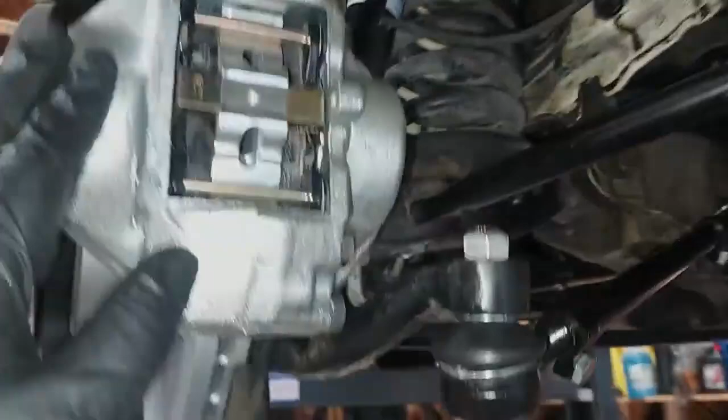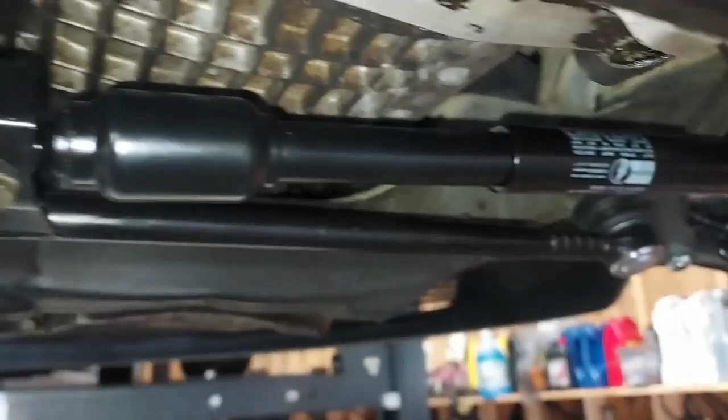All right guys, we're officially done with the front end rebuild. New bearings, cleaned up the hubs, new rotors, new calipers, new pads, shock, new ball joint, new outer tie rod, new center link, new Bilstein steering stabilizer, new outer tie rod here, new brake control rod bushings, new control rod to lower control arm bushings, and that was a lot of work.

So what we're going to do now is get on a fresh oil pan, because we can see this oil pan has a dent in it, and I don't like that. The car still runs fine, it's not affecting anything, but we want to fix that.

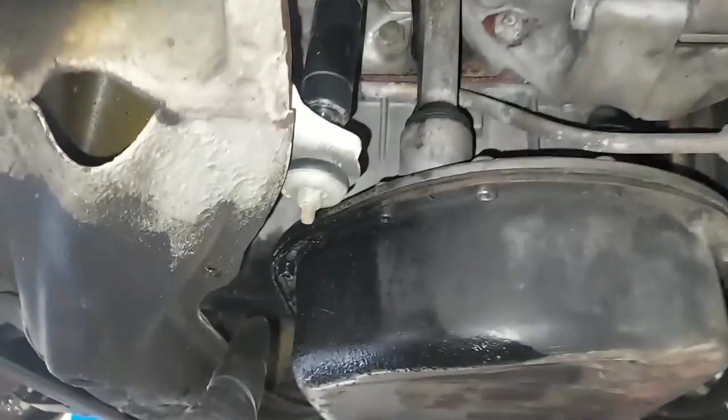The way we do that, there are like 30 little Allen bolts around here. These only torque down to like 8 Newton meters. It is so small of a torque setting, but the way they keep it in place is just they put a lot of them. If you tighten them too much, you bend your new pan and it's not going to seal correctly. So let's go ahead and drain the oil and get that pan off of here. Changing the pan is going to let us do the oil change service too.

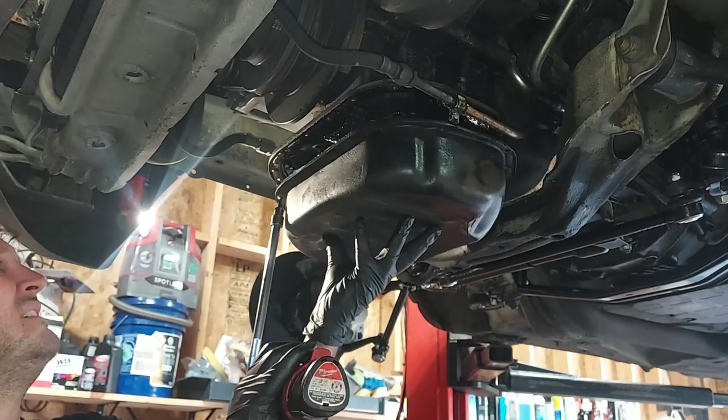Beautiful, we'll just set that right there. What we're looking at here is the inside of the body of the engine.

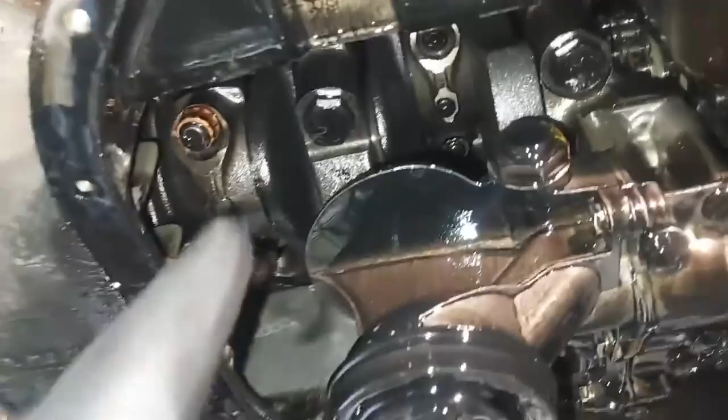There's a rod right there. There's a main bearing cap right there. There's another main bearing cap. Here is the oil pump, that just is covered in oil. It lives in oil. There's the oil chain, double roller chain for the oil pump. That's how durable these motors are, they put a dual chain on there.

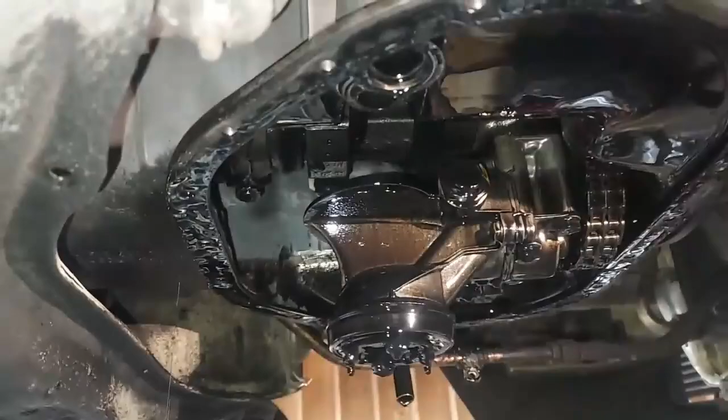And here's the oil pickup, and you can see right there, there's our nice clean screen. See how clean that screen is? There's no debris or anything in there. So we literally don't want to touch anything here. We're going to wipe around the edge, clean that off, and then put our new gasket and new pan up there.

All right, let's go ahead and wash up those nasty old oil pan bolts. I just put them in a cup, stir them around. There we go. See how clean they are now?

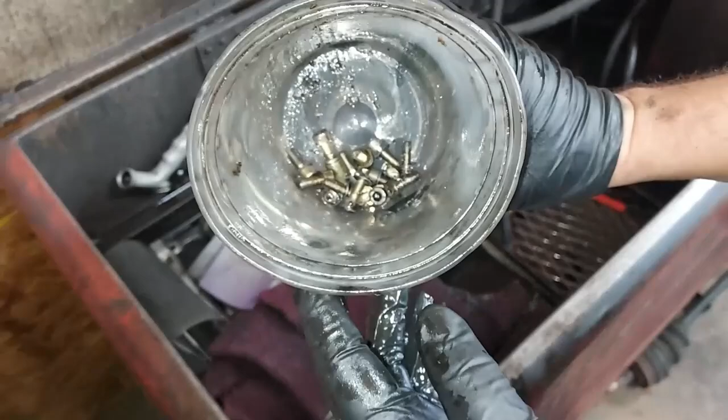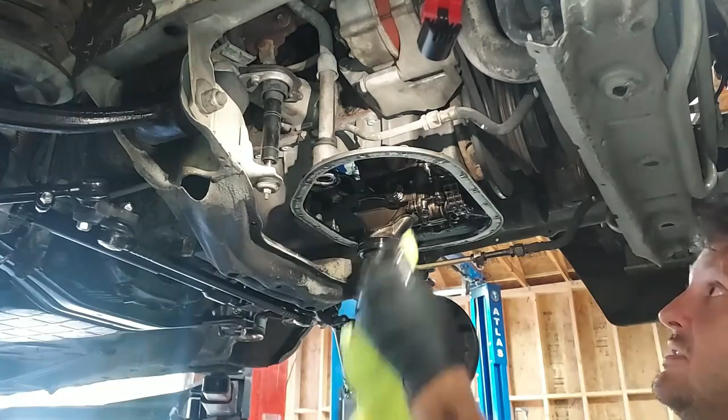So let's go ahead and put this pan back on. Guys, you don't need to get it perfectly clean, there can be a little residue on there, but you just want to try to get the majority off. And you don't want to use sealant up here because it's a paper gasket and it requires no sealant. All right guys, that is sufficient, that is nice and clean, and we have a smooth gasket surface.

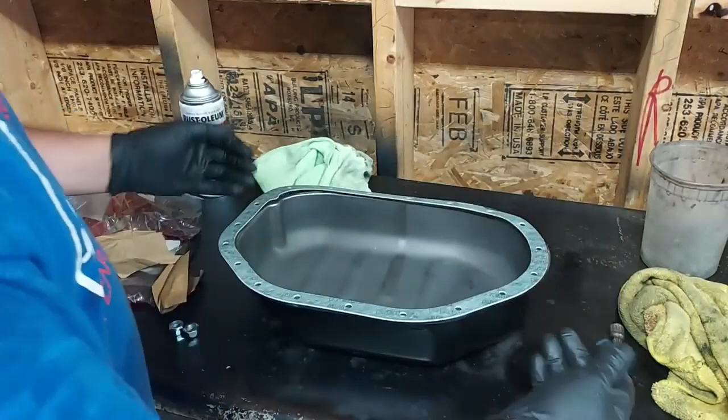All right, so here's our oil pan gasket, and the oil pan has been all cleaned up, nice and shiny. So we're just going to get 2 bolts in there to hold the pan in place, and then we'll go around and torque all of those to 8 Newton meters.

The Germans, we need 47 bolts for the oil pan. Yeah, we need 47 very tiny bolts. That was like a horrible German accent. It's almost like Toyota, they do the same. Wunderbar, wunderbar, as they say, yeah. Yeah, yeah, all right, thanks man.

That'll hold it until I can get the rest started. So anyway, I'm going to go ahead and do that, and I'll probably put it on a time lapse here.

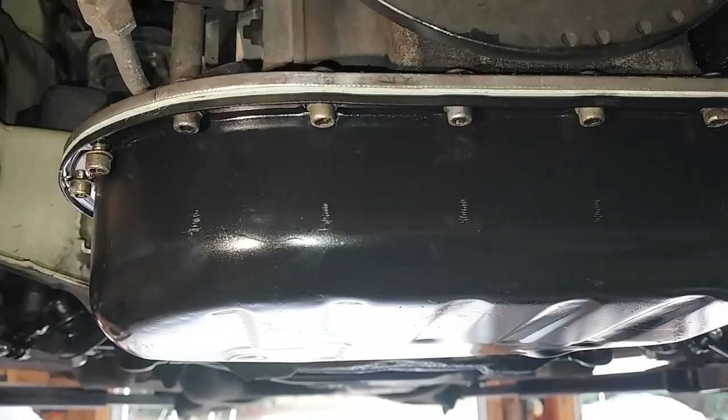Okay, we have all the bolts in. You can see that we have our spacer for the transmission cooler line. And we need to torque these down to 8 Newton meters, which is basically 70.8 or 71 inch-pounds, because my small torque wrench is measured in inch-pounds. That's it, it is not much, guys.

Hey, remember the hood. Oh, I'm not going all the way up. Okay, I'm only going up just enough to get the wheels out of the way so I can get to this bolt.

All right, there we go. Got them all torqued down. And we are good to go with our brand new oil pan and brand new gasket. Looks really nice.

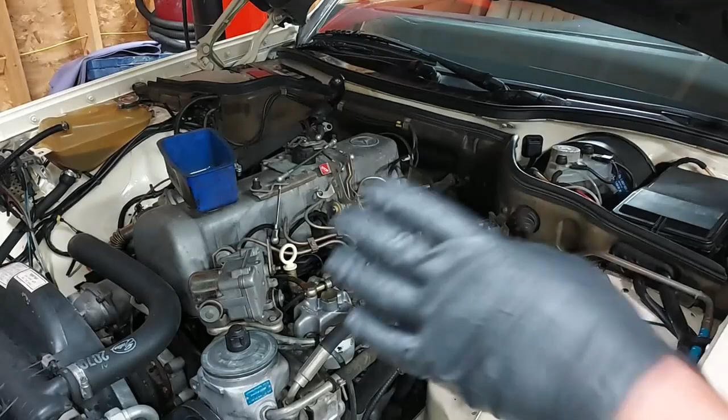All right, so now that we have the new oil pan on there, let's go ahead and do a fresh oil change.

There we go. And there's our old O-ring that we need to replace on the filter. And we'll go ahead and put our new filter on here, and we need to put our new O-ring on there too. All right, put our new O-ring on there. There we go. And let's put this back down in here.

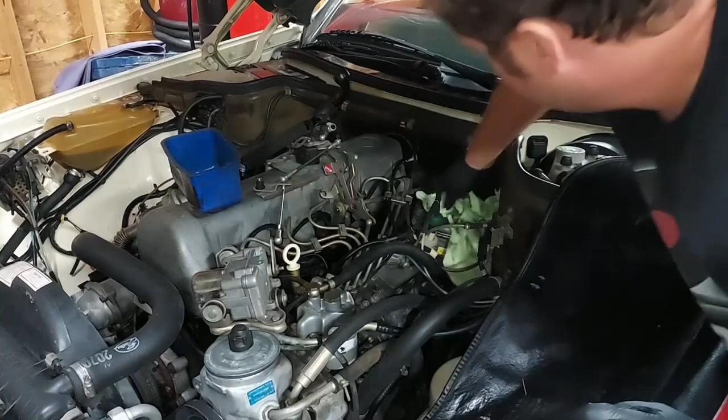There we go, that is snug. Let's wipe that off, and then we'll take a look and see what that looks like.

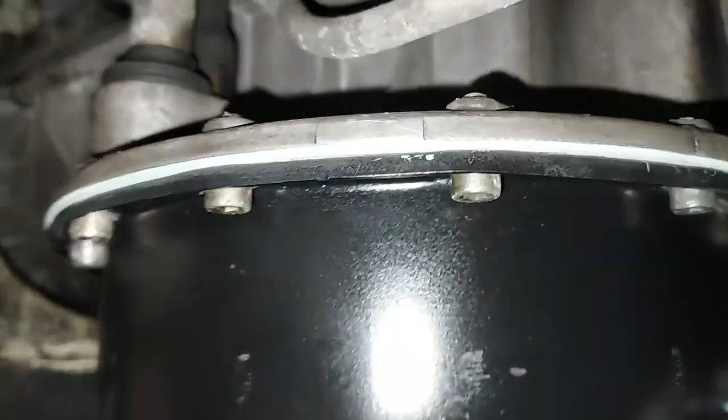All right, we definitely have enough oil in there to seal the oil pan, and we can see, good, we have no seepage at all. Of course, we'll check that again after we run the motor. All right guys, what we want to work on next.

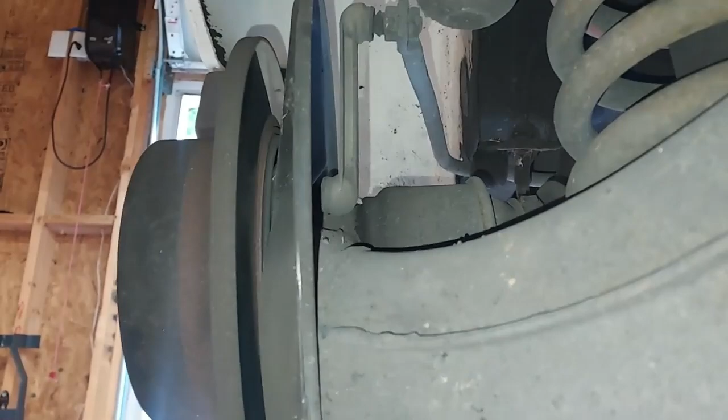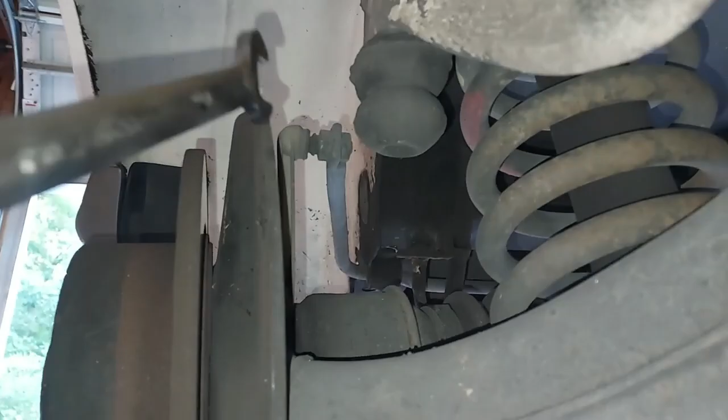There we go. There's our sway bar end link, and you can see the boot is no longer intact up there. We got a 17 millimeter right down here we got to break loose. And then there's a 17 millimeter right up there we want to break loose too.

There we go. Here's our old sway bar end link. See how the bushing's ripped? And that's just kind of flopping around in there. I'm sorry, not the bushing, the boot is ripped. Here's our new one. See how stiff that is?

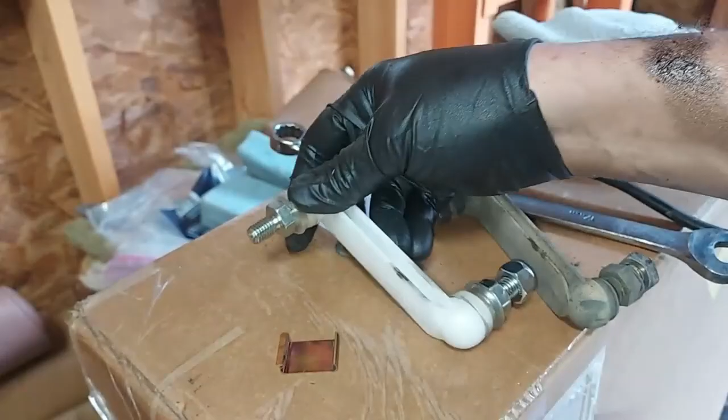So let's go ahead and put that back up in the car. Hold our nut right there. There we go. There's our right sway bar end link, and there's our left.

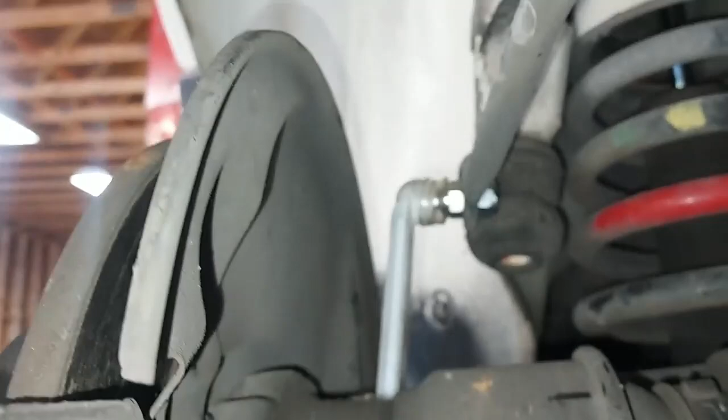So next we want to go ahead and start taking out the shocks, calipers, and rotors. These rotors are still pretty damn good, but I ordered a brand new set, and we're going to go ahead and change the hoses, calipers, and rotors, along with the Bilstein shocks in the back.

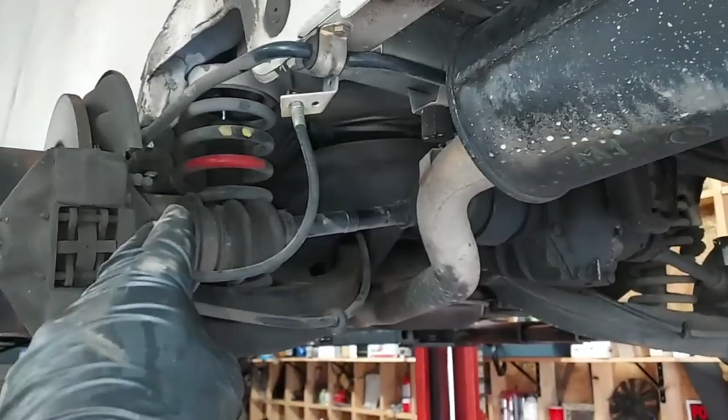All right guys, you can see I'm on the back of the car, and we took the seat bottom out. There's just a button you press on the seat bottom. Let me show you that button. See that little, it's actually a red lever on both sides, and you just press that lever, and the front of the seat will detach from these brackets here.

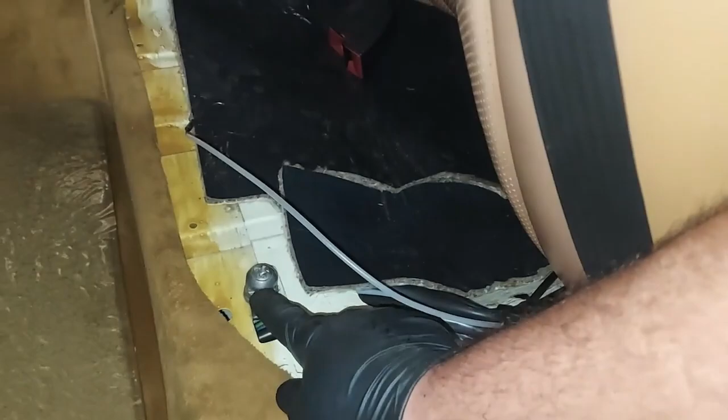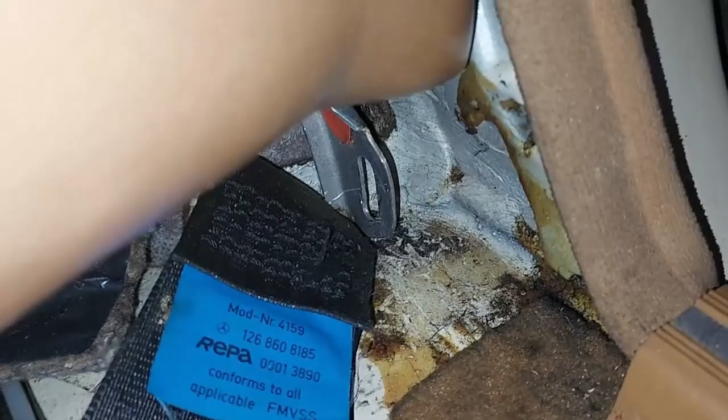And then on the back of the seat, there is, you probably can't see it. Let's see, there it is. We have a bracket right there that goes into the side of the car, one in the middle and one on the other side. And then the back of the seat, there's clips right up here. If we look through this glass, you see there's the brackets on the back of the seats that go onto these clips. So basically, if you lift up the seat, it'll detach from these clips, and then you can pull it forward.

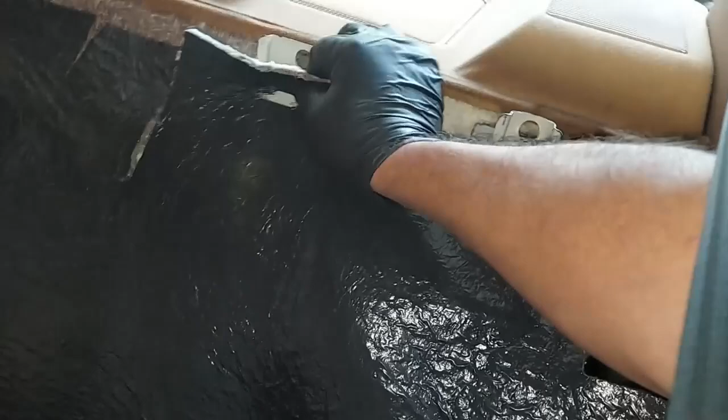When you pull it forward, I like to put the seat belts around it to hold it in place. And then right here we have our insulation, so we just disconnect it, fold it down, and this is what we want access to. Right here, that's the access hole for the shock. Let me get my screwdriver.

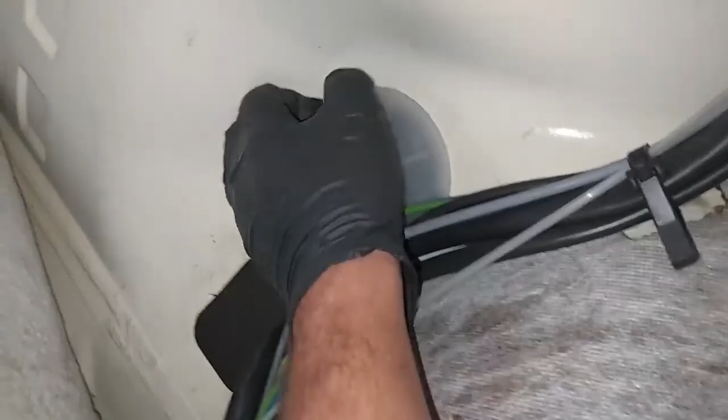Hey, can I use your pocket screwdriver? Thanks.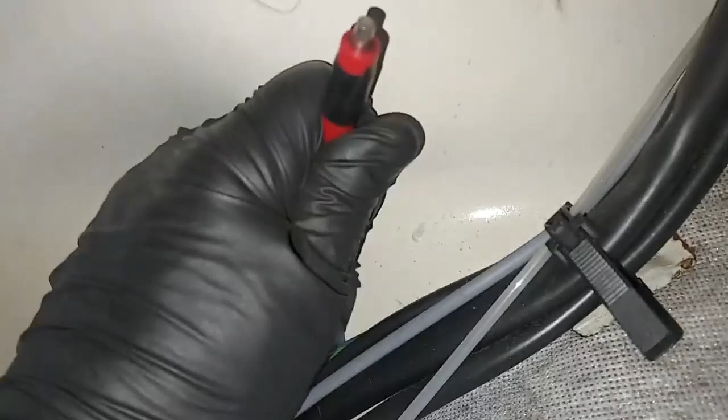Here's the access hole. Come on, I need a bigger one. There we go. There's the access hole for the top of the shock.

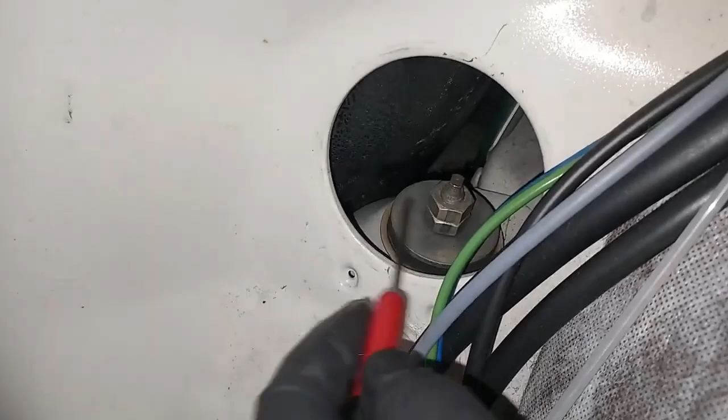So we're going to take those two nuts off and then lower our shock through the bottom of the car to change our shocks.

And then this is the access hole for the fuel sender. You can see we can disconnect the fuel sender right here and use our special tool to screw that out, and that will allow us to clean the fuel sender. So let's go ahead and tackle that now.

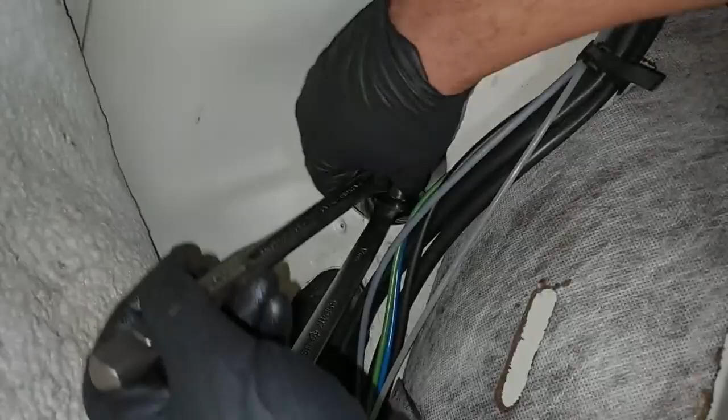Okay, so you got to have this shaved down real thin like that, so it fits around here, and that allows us to get a socket on the top of here and break it loose. We can put that on here like that, hold the bottom one still. There we go. And that nut will come off.

All right, so we're under the car now. You can see I've already taken one of the bolts out. I'm going to go ahead and take the other one out. And there we go. There's our shock.

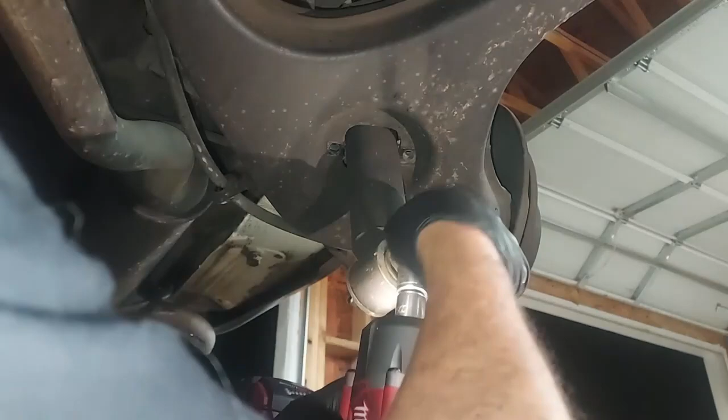We're going to put some nice new Bilsteins in here. Let's go ahead and lay that one down. And there we go. That's why we just attached them from the top.

All right, you can see we have the nice new Bilstein shock here, and Bilstein gives us all new hardware and bushings. Now, to install the bushing, it's very simple. Basically, you just put it up, you got to thread it back through the hole on the top. Gonna find the hole up on top. There it is, and then it fits right. All right, then we're just gonna thread in.

I need the other one. We're gonna thread in our new hardware here.

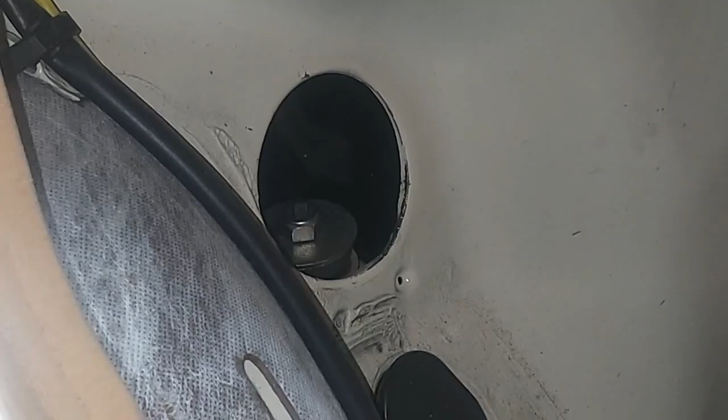And then we'll torque that down, and then we're ready to go reattach it on the top side. All right, so as you can see, we've installed our bushing, our cover plate, and our lock nut. Let's just go ahead and tighten all that down.

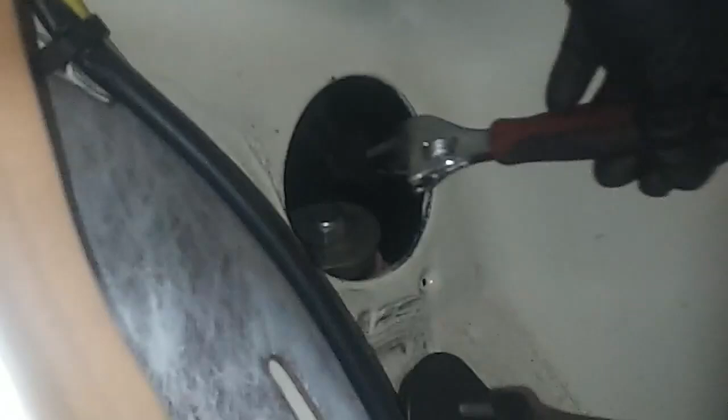Now I like to look at the position of the top of the shock to see if it's spinning as I'm tightening. It looks like this one is, so we're going to have to hold the top of the shock still while we turn it with a wrench. Right there, and we can hold the shock still, and then we can actually tighten it.

Okay, now we need to remove our fuel sender. You can see I got my tool on there. There we go, it just screws out.

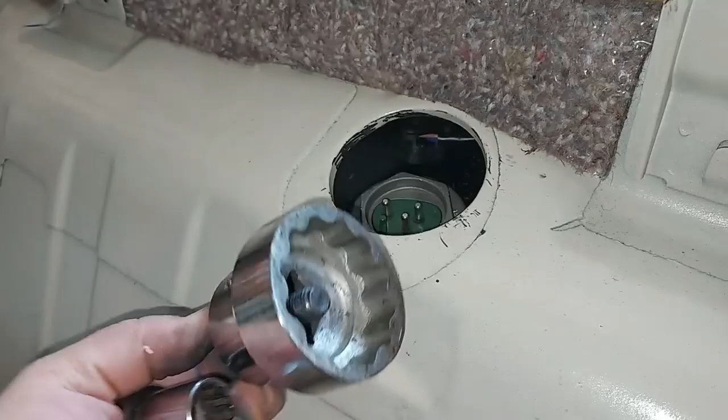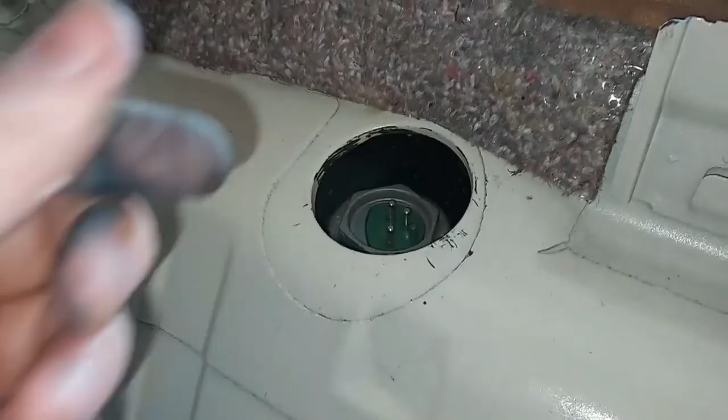And we can get the rest out by hand, so let's remove that. There's the tool, and then we'll screw this guy out. We need to get a little catch pan because some diesel is going to flow out of this, so let's go ahead and finish pulling that out. All right, we got our catch pan here.

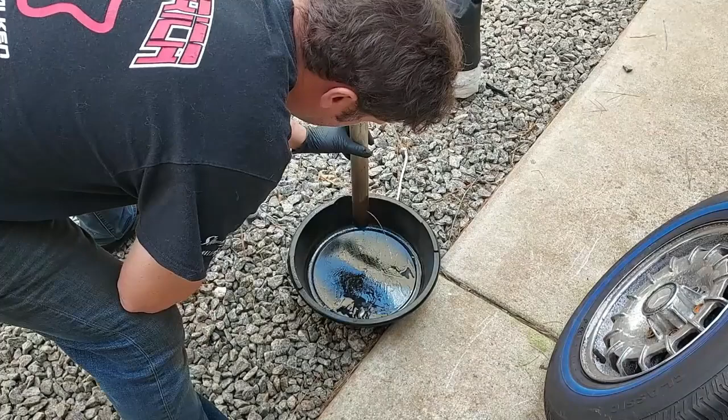There we go, these senders are cleanable, so we're going to get it over the bench. We're going to disassemble it, we're going to clean it out to make sure there's no gunk in there from years of dirty diesel going through it, and then we'll reassemble it in the car.

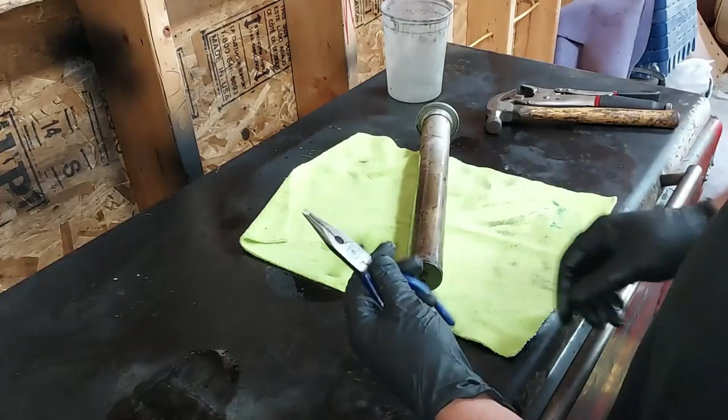So to disassemble these and clean them, I just modified a set of pliers and shaved down the ends till it was kind of a fine point. There's a little nut right in here with some grooves, and you just get it in there and then you can spin it and it comes off. When you see it, you'll know what I'm talking about. So we'll set those pieces aside.

And there we go, now we can kind of pop it loose. Oh good, this one's actually in really good shape. I don't know if you can see on the camera, but there's 3 wires here and a bobber, and that bobber moves up and down on those wires. So what we want to do, we're going to go ahead and just clean off all the gunk from the bottom down here, I see it's a little dirty. But other than that, this is a very clean sending unit, and we don't need to really do much to it.

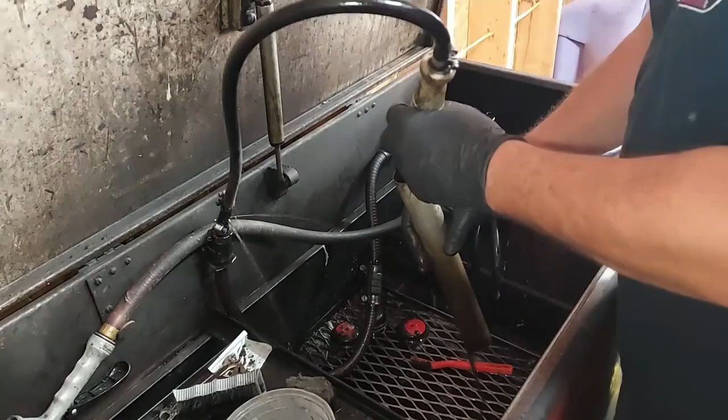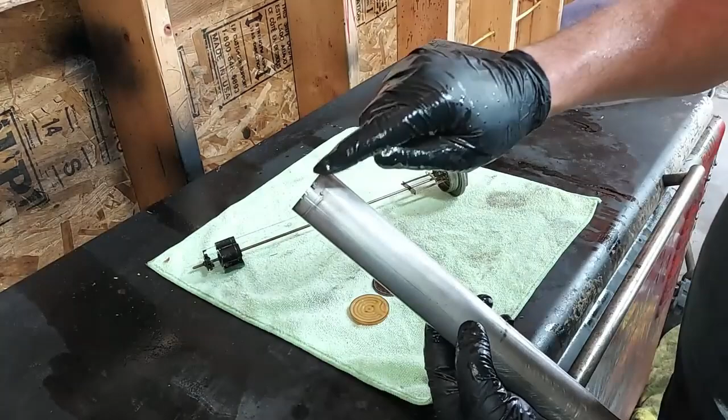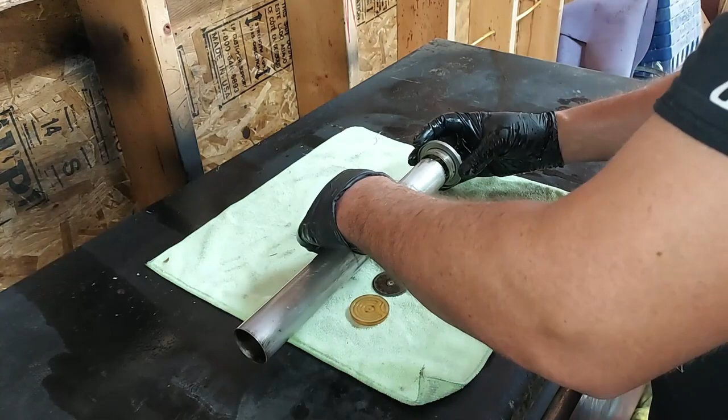You can see our bobber is working excellent. So to reassemble, you have a little notch right here, and that notch matches up with the notch right here. Just want to be careful not to break your metal lines, the little metal lines in here. We'll just slide that through like that, line it up with our notch. There we go.

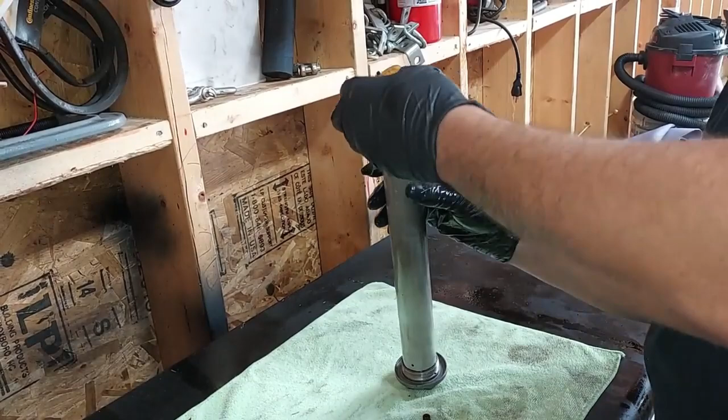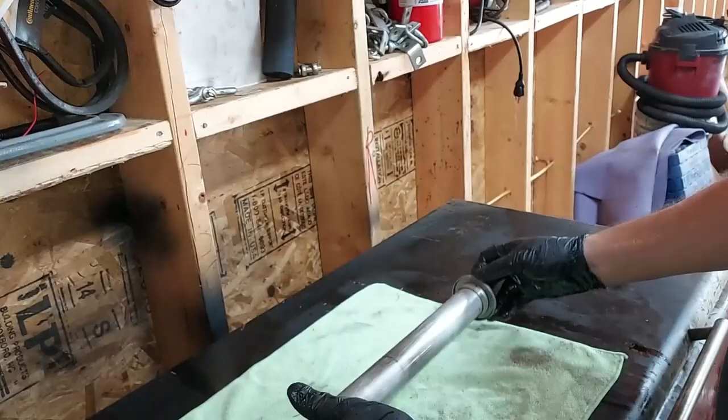Then we're going to put our plate right back here on the bottom, like that. Perfect, and put this plate right there. And then we want to screw our nut back on. Perfectly cleaned and restored sending unit. That'll last another 100,000 miles probably. Let's put it back in the car.

Okay, when you're putting your fuel sender back in there, you want to make sure you include an O-ring. You want to put a new O-ring seal on there so you don't get diesel fumes up in the car. We just slide that back down in there. And there we go, there's our cleaned fuel sender.

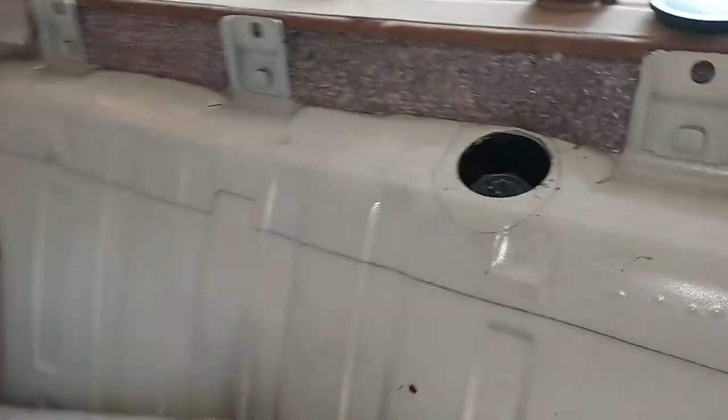All right, so at this point we've installed the new shocks, we've cleaned the fuel sender. Let's go ahead and plug it back in. There we go, and we'll put our cap back on there, and let's put our shock cover back on there. And we'll put it on the other side, and then let's get this back seat back in.

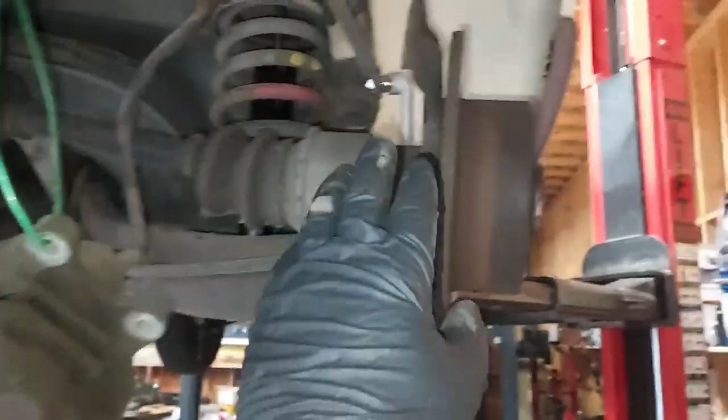Okay, we got our beautiful new Bilsteins and sway bar end links in there. Now we are removing the rear calipers and rotors, and we're going to go ahead and put some brand new ones on here.

Okay, to remove the rear rotor, once you have the caliper off, it's pretty easy. Make sure your parking brake is not engaged, so you can slide it off here. And there we go, and you actually have your parking brake right here, and here's your hub.

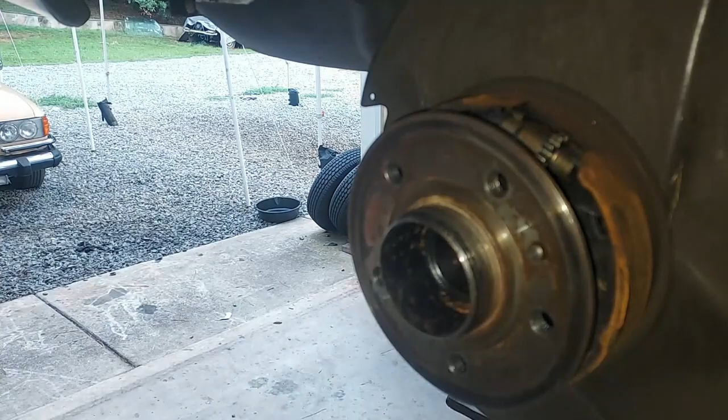So let's go ahead and get our new rotor to install. You'll notice there's a locating pin, a dowel pin right here, and that dowel pin lines up. Here we go, with the dowel pin on our new rotor.

So there we go. Now let's go ahead and crack loose this brake line, and we'll put our new brake line on the new caliper and then reattach the line.

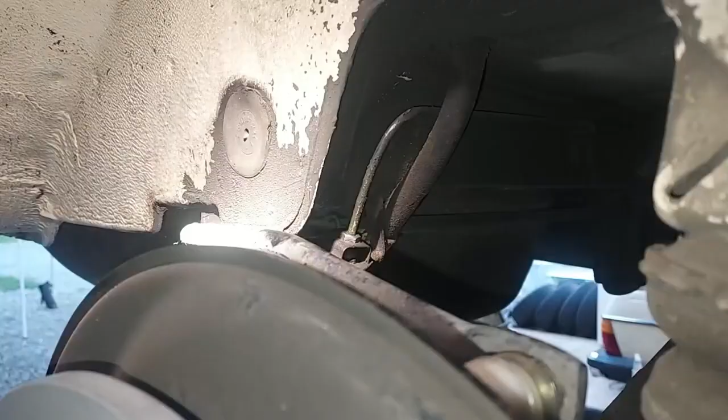Okay, there you can see our brake line back here, and I went in and wiped a little dirt away from the brake line. We're going to get our line wrench in there. There we go, came loose, I think it was in there. Now I'm just going to snug it back up a little bit so it doesn't leak. There we go, that one is broken loose.

And now let's go ahead and get our new caliper prepared.

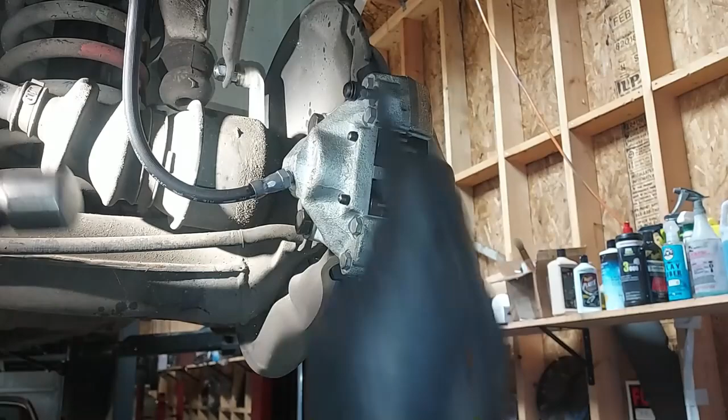Okay, here we go. And here are our new ATE brake lines. All right, we get our punch here. Make sure it's lining up on the other side. Yep, it's lining up, beautiful. And there we go. New brake, caliper, rotor, and brake line. So now let's go do the other side, and then we'll show you everything when it's done.

Check this out, I just found this in the trunk. It was under the spare tire. And these are all the original handwritten service records for this vehicle. Look at that. There we go.

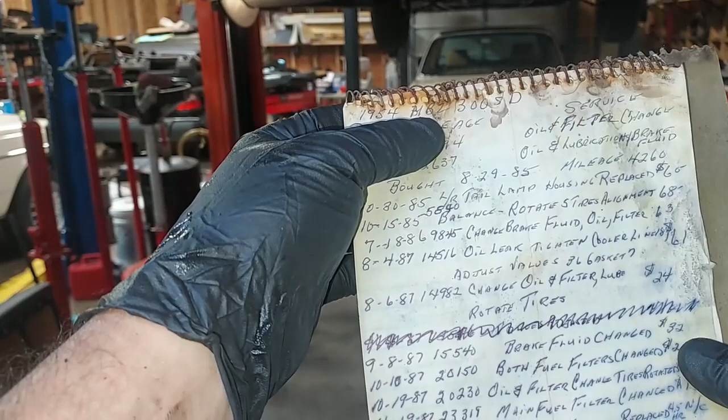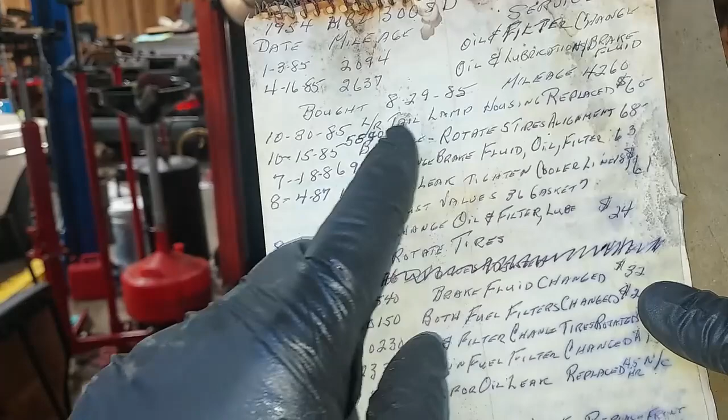84 Mercedes 300 SD. Date 1385. Mileage 2094. Oil and filter. 41685. Oil and lubrication and brake fluid. Wow. Oh, there we go, like then they bought it. 8-29-85, so that must have been like dealer service there that they wrote down.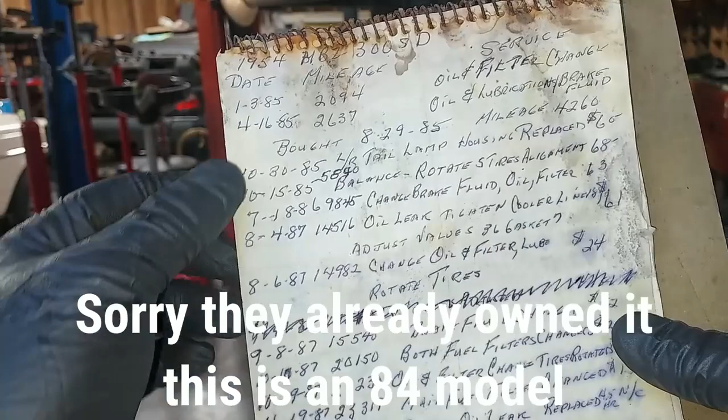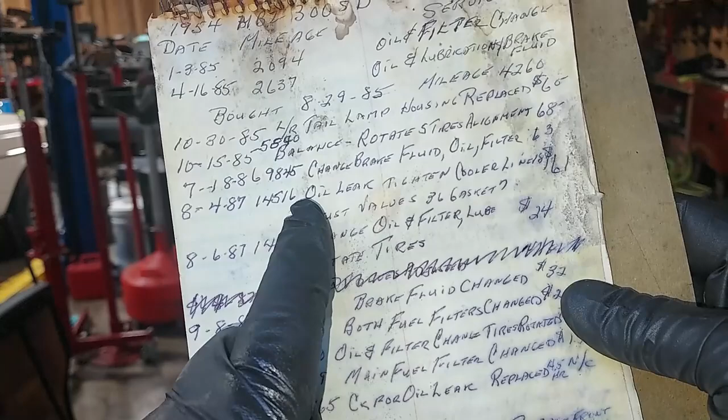Here they go, oh, tail lamp housing replaced. So there must have been like a defect with their tail lamp housing, so they had it replaced. Balance rotate tires. Change brake fluid. Oil leak, tighten oil - the oil cooler lines were a little loose, so they had those tightened. Adjust valves. Change oil and filter.

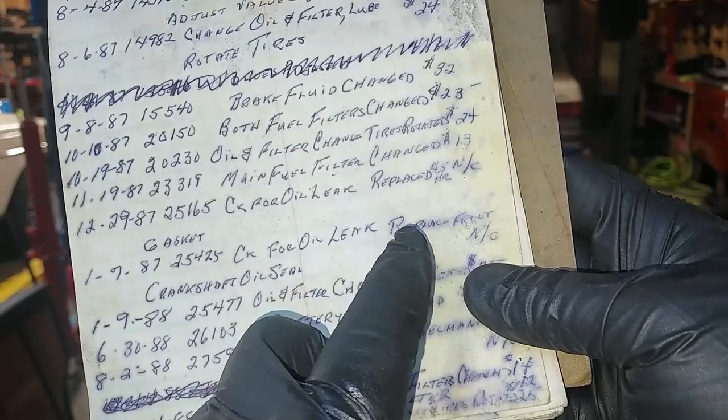This is so cool. There you go, 87. All right, this is something. Looks like they were chasing an oil leak right there. Replaced - it's like a fitting, maybe it says fitting. Oh, there we go, it was the crankshaft oil seal. So that's the seal on the front of the crankshaft, on the front of the engine, back in 87. So they resolved that issue because it's bone dry up there now.

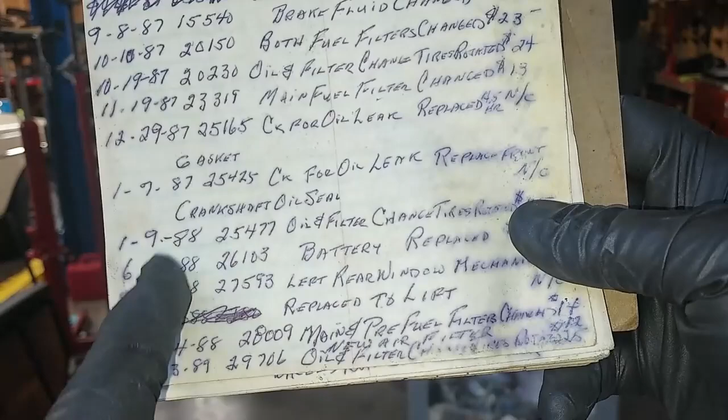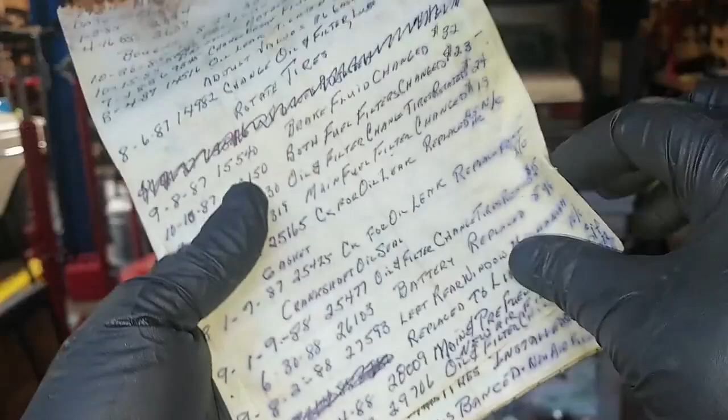Replaced the battery, left rear window mechanism, 88, 89. There we go, we're up to 29,000 miles. How cool is that? Anyway, all this stuff, 96, 97. They were servicing this thing regularly, like taking immaculate care of this car. Oh, here we go, 2000s. I guess that's when Costco appeared because they bought some tires.

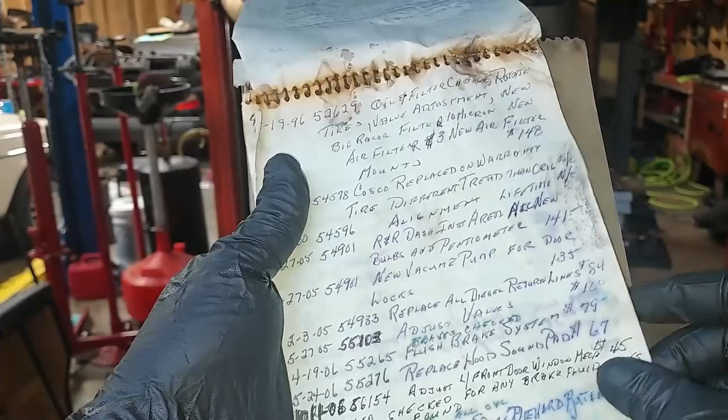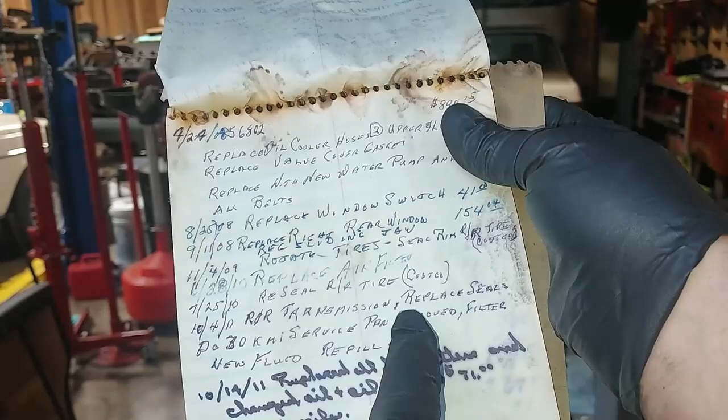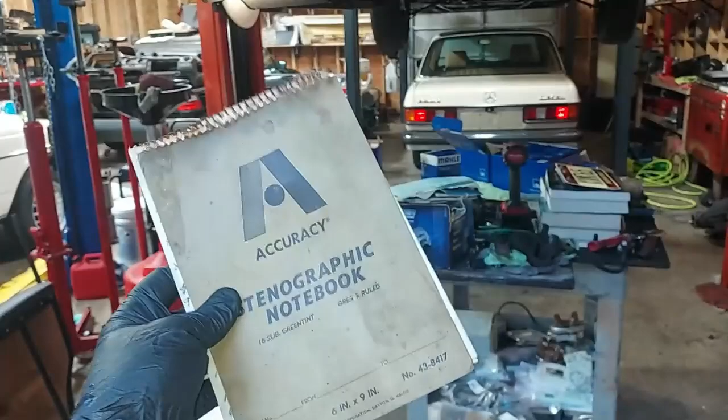Oh, and I can see the owner is getting a little older here - see, the handwriting got really bad here. Oh, look at that, they replaced the seals in the transmission. That's awesome, that's probably the front, the pump seal in the front. There we go, transmission pan removed, filter changed. This is great, and it stops there in 2011. But that's really cool, there's like 3 pages of original notes back to like 1984. So that's definitely going with the car.

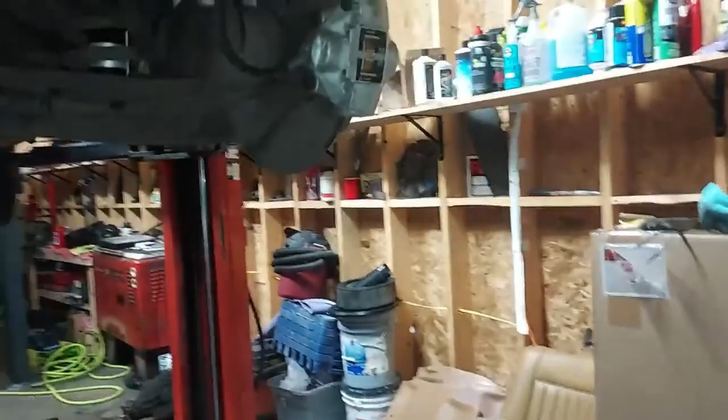And we are done. So we have the new ATE caliper, ATE rotor, ATE brake line. We have our new Bilstein shocks. We have our new sway bar end links on both sides of the car. Man, it looks so good down here. I cannot wait to drive this car to the alignment shop.

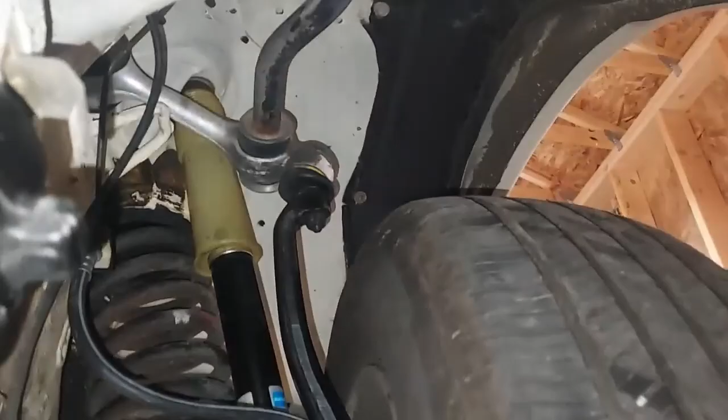And all of the front suspension - guys, look how beautiful that is. Is that just me, or is that beautiful? Am I the only one that thinks brand new front suspension, brakes, and rear suspension is beautiful? Look at that, that looks so good.

New Bilstein shocks up here, all new hardware. That looks so nice. Oh, and I can't forget to mention our beautiful new oil pan with our new oil pan gasket. Look how nice that looks.

All right, I've already put the front wheels back on there. I got to put the back wheels on there, and then I have to bleed the brake system, and that's going to be it. This was a 3-part series. We did all the suspension, all the brakes. We did the fuel sender in this video, rear shocks. That is all taken care of. Now we're on like the final home stretch to finish this car up.

So going over to my buddy's Wednesday to have the AC system completely overhauled. They have the equipment to do that. I'm not licensed - I can refill a system, but I can't evacuate or disconnect a system, you know, the Freon goes everywhere, and so I'm not licensed to do that. So we're going to do new compressor, new dryer, new O-rings in the AC system. That's going to be Wednesday.